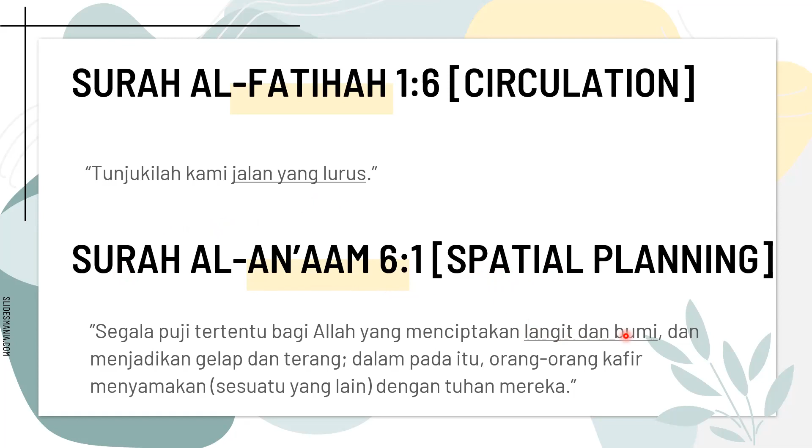The third ayah is Surah Al-Maidah ayah 8, which will help in our building form and design. The keyword from this ayah is menegakkan keadilan and berlaku adil, meaning fairness. We want to make the building form have fairness in space, so we will use a shape of square, a shape of cuboid, because there is meaning behind it, which is fairness.

Next is Surah Ali Imran ayah 9, which is where we get the concept from. We highlight the keyword menghimpunkan semua manusia, meaning gather all human beings. From this ayah we get the concept of connecting, but in order to make it more suitable to the term of architecture, we filter the word and get the word interlock. We will soon explain about it.

The next ayah is Surah An-Nahl ayah 13, about variety of ethnic. From the keyword berlainan jenisnya, meaning various types, we want to relate this back to the various ethnicities in Sarawak.

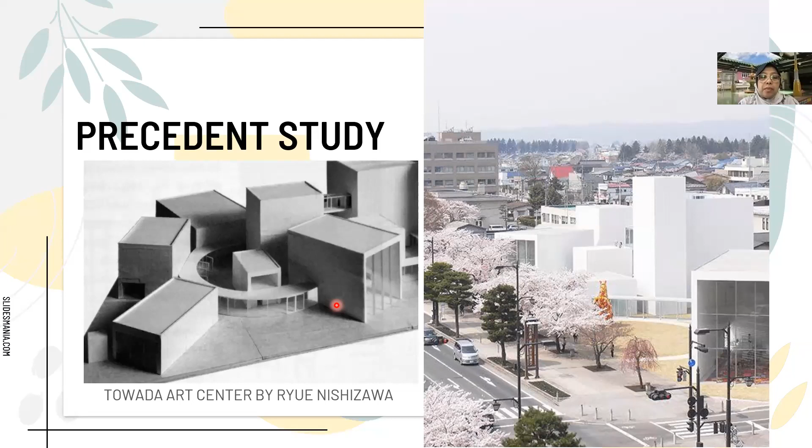So for the design strategies, based on our naqli study, after our naqli reference, we rearrange it to make it more prioritized.

First is the concept of interlock, from the verse of Ayah 9. Next is the form, where the form comes from the solution for our naqli study, which is fairness.

So in the design, we will apply a form of primary shape, which is square or cuboid, because there is a meaning behind the square or cuboid shape - it gives the fairness of the space within it.

Next is the facade, which is from the naqli study of Heaven and Earth. We will apply a building with a big opening of glazed wall, viewing both earth and sky, so we want to have the interlock between the visitor and nature.

Next is the spatial planning. We want to have the interlock between the visitor and nature, so we will embrace nature into our design by putting a courtyard in it.

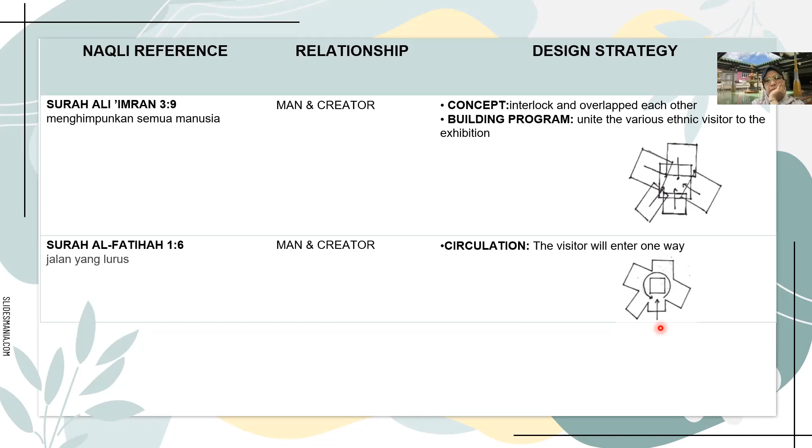Next is the circulation, from Surah Al-Fatihah. The visitor will enter one way and exit only one way, where the path is straight, with turns only to the left and right - we'll show you later. Next is the form of the building.

The building will differ in height to give the rhythm of layering and to show more visibility of the interlock.

So this is our design process. First we make the symbol of unity. Usually when making the symbol of unity, we think of having a circle of a group of humans, where they circle together in a group, like this - this is from the view of the plan.

Where the various ethnicities are grouped together in one shape, and then in order to make them have a more intimate relationship, we make the buildings interlock with each other to show that the various ethnicities have a relationship between each other.

By having the interlock, we want to be more explorative and diverse. So we put the circle shape, where the circle shape gives the meaning that each tribe, each ethnic group, will be looking at each other in order to understand each other better.

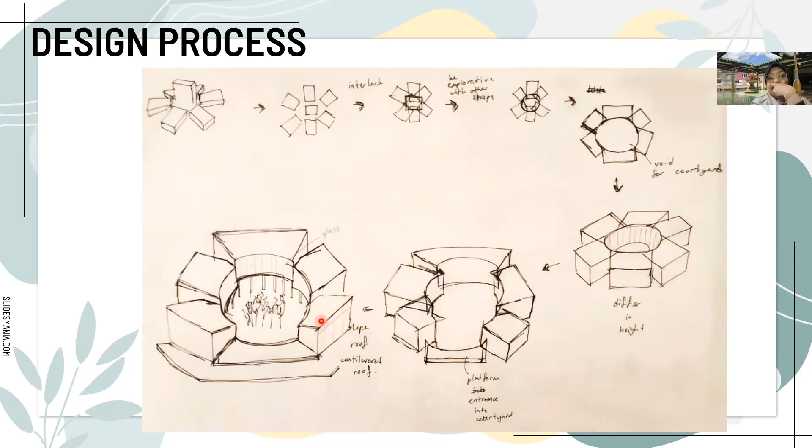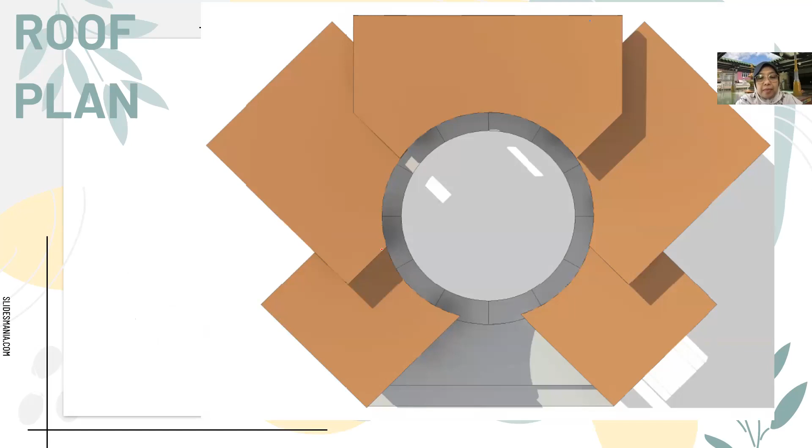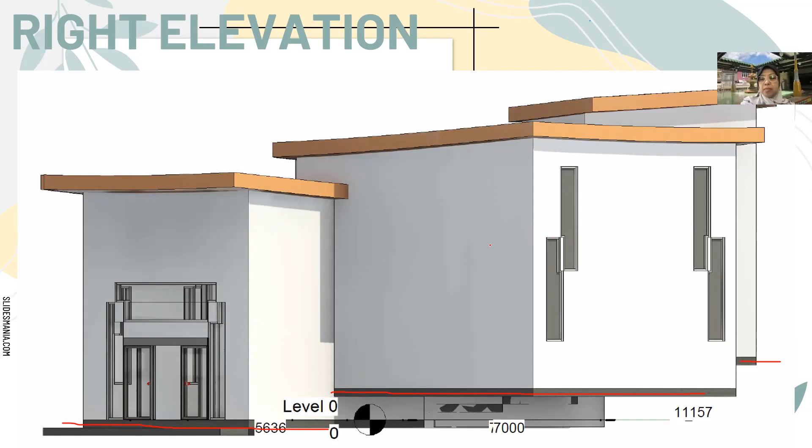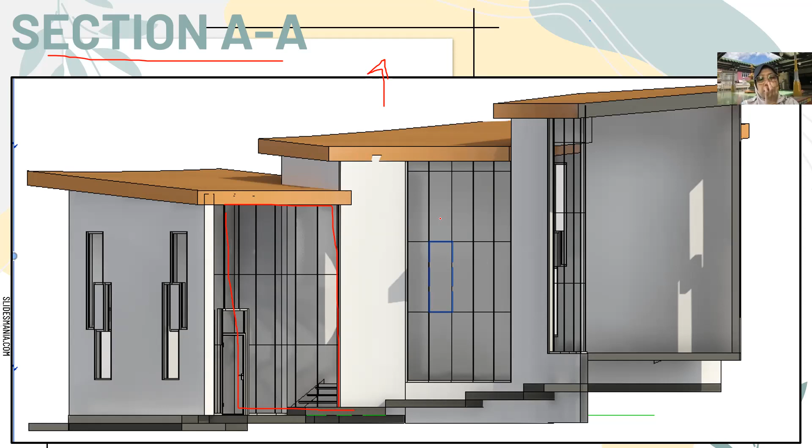Next I want to show how we interlock other elements in our design building. It is in our window, which is interlocked. From the shape of a square, we interlock each window like this, because we want to create a beautiful shadow in our building.

This one shows more visibility of the interlocking in each room.

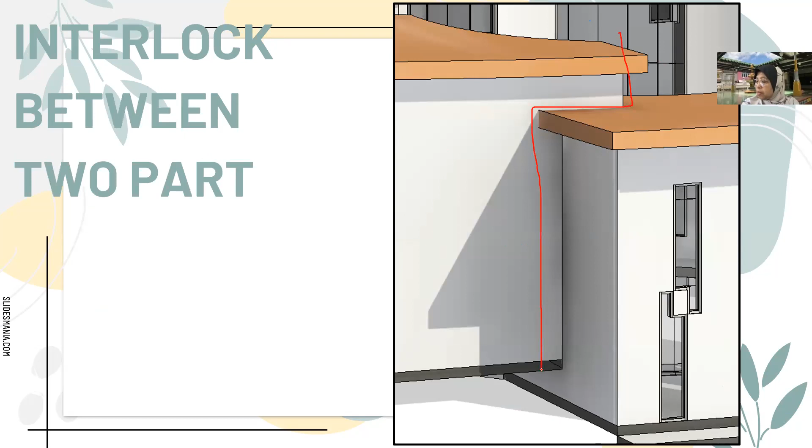So this is the layering platform. In this layering platform, we want to show the process of making lapis, like from the previous explanation, layer by layer, creating a pattern where we can see the layering of the platform.

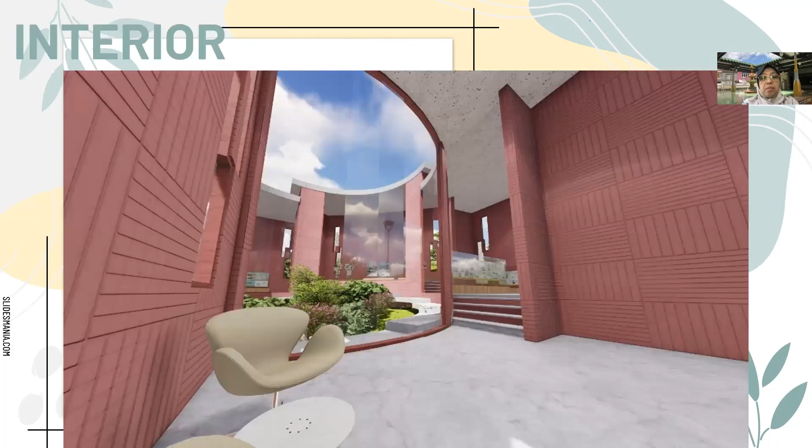So this is the glass wall which is facing each other. This is our interior, where we can see the full glass wall, so the visitor could feel nature through the viewing. This is the interior, and we can see the pattern of the kek lapis installed in our wall.

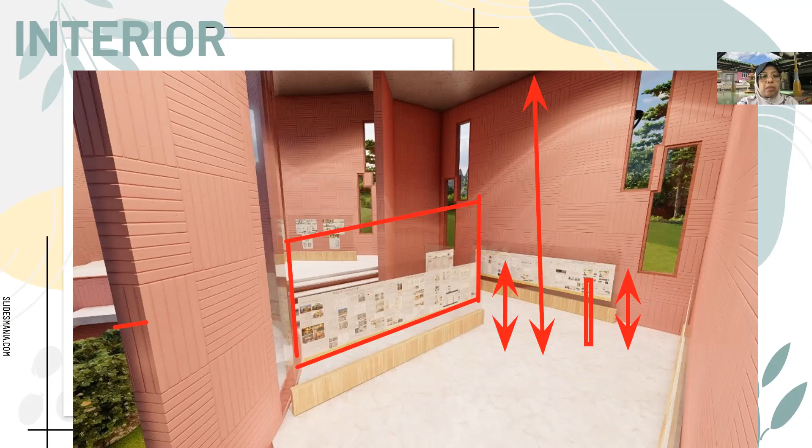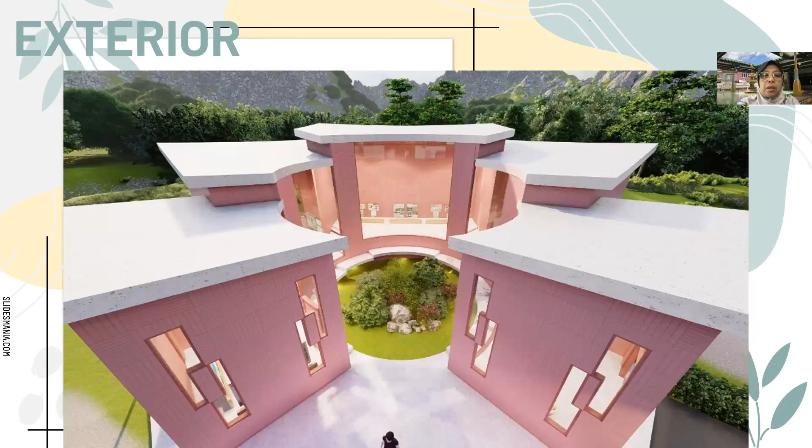So this is our exterior, showing the courtyard and the glass wall facing each other. This exterior view is from the upper level point of view. So that's all, and this is our board.

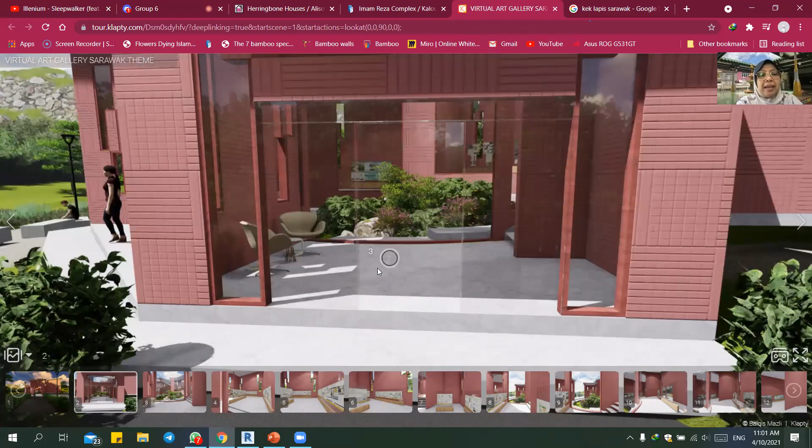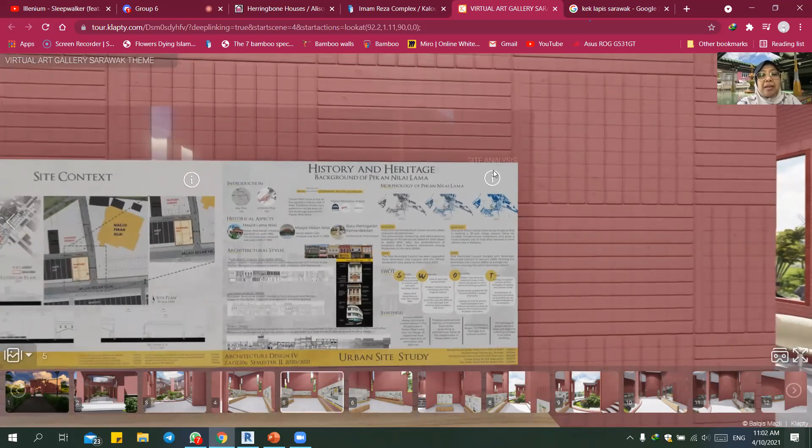Next, on the second floor is the room for site analysis. So the visitor, when they enter the virtual gallery, just needs to push the i icon button, and it shows here.

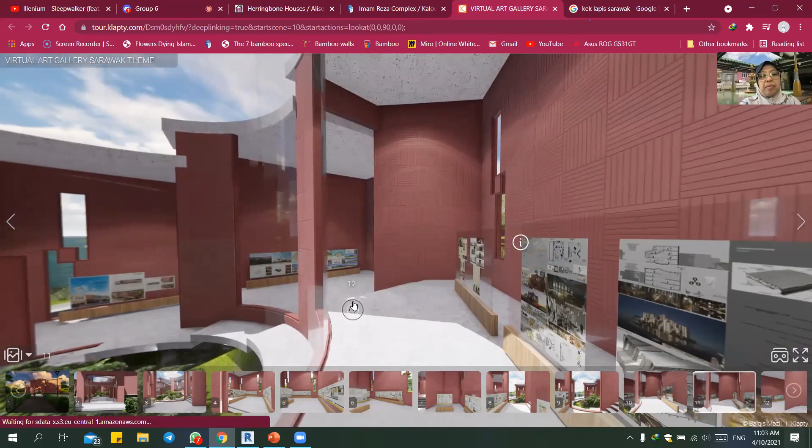So this is the third exhibition room. This is the spot for the third year's project design.

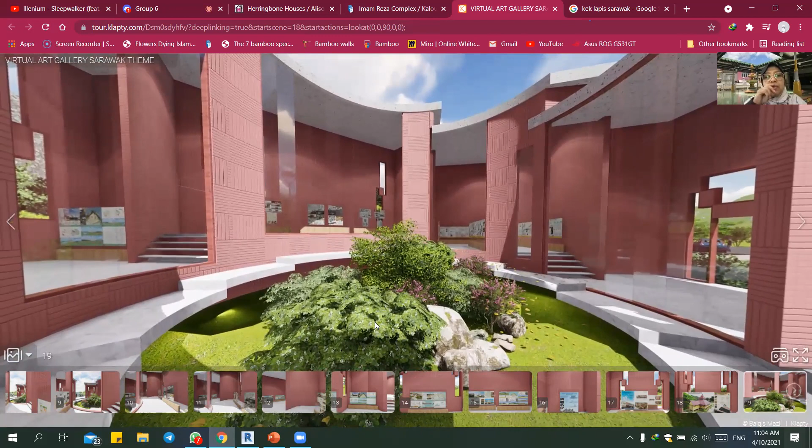So this is the last room exhibition, which is the measure drawing. And then that's the visit of visual art gallery.

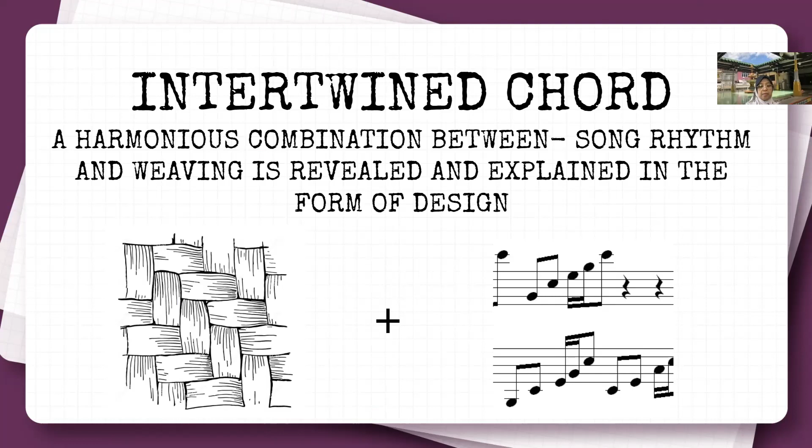Next, I will continue with the precedent study. Our first precedent study is Penleigh and Essendon Grammar School Music Centre, located in Melbourne, Australia, built in 2020, designed by Charles Ryan McBride.

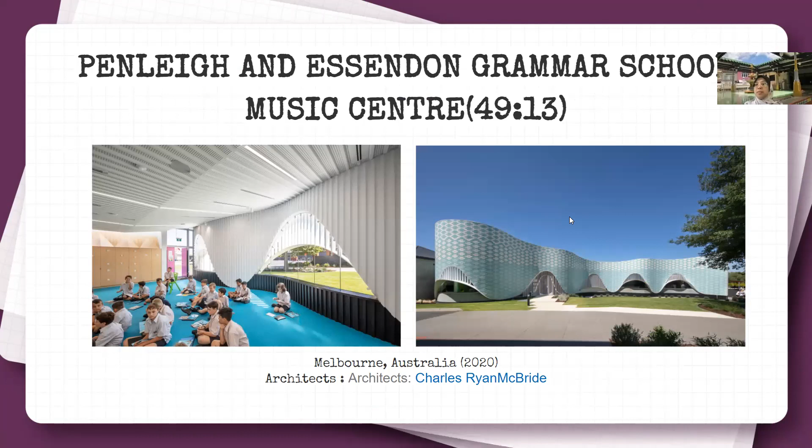The thing we conclude from this precedent study is the parametric design, which is a process based on algorithmic thinking that enables the expression of parameters.

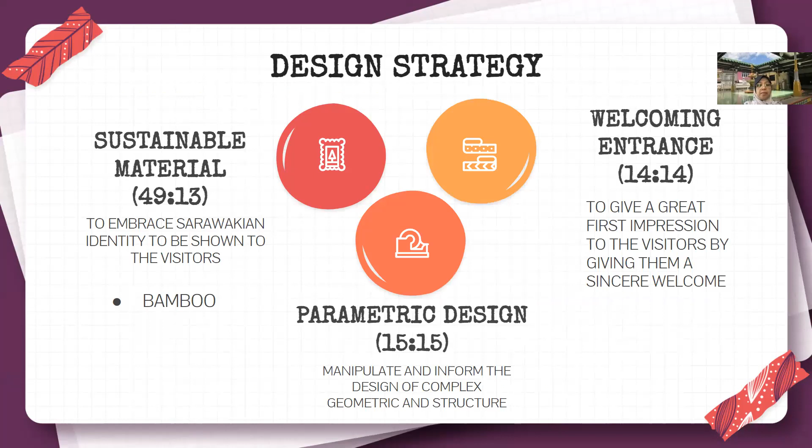Next is Chuan's Kitchen, or Infinity Mind, located in Foshan, China, built in 2017. Here is the design strategy of the restaurant: first, using sustainable material; second, parametric design; and third, having a welcoming entrance.

Next is Centre Pompidou Metz, designed by Shigeru Ban Architects, built in 2010, located in Metz, France. The design strategy is about clear circulation and the parametric roof.

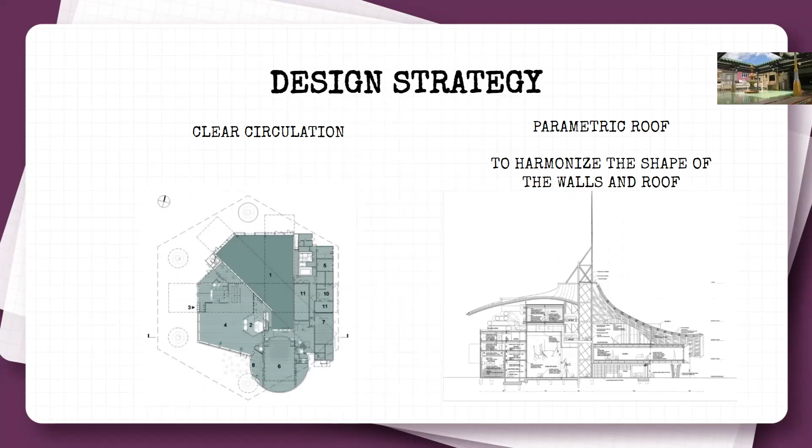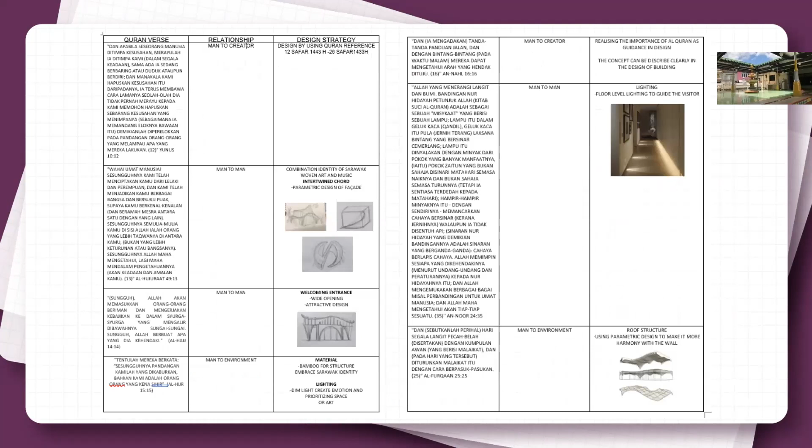To conclude all the precedent study, here is the layout for our exhibition. To conclude our precedent study, I made a table which includes the Quran verse, the relationship, and our design strategy.

The first one is from Surah, the first day of our design, which is on 12 Safar. It is a verse related to the relationship between man and the Creator. This highlighted to us that we need to use the Quran as our reference for our design.

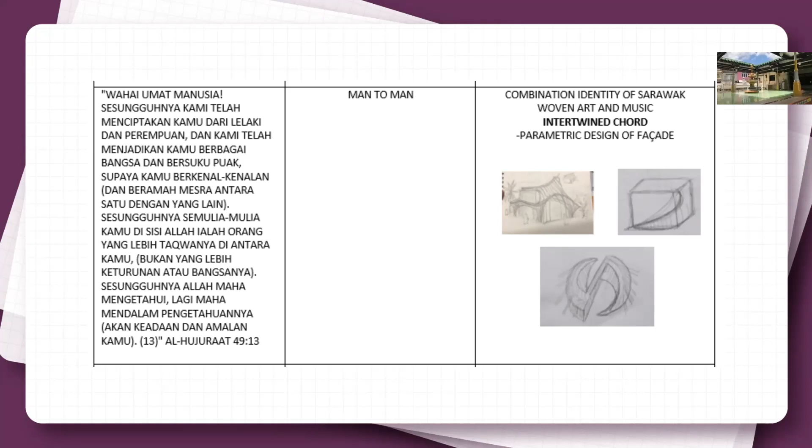Next is on 13 Safar, where our Quran reference is Surah 49 verse 13. It is the verse of the relationship between man and man. So our design strategy for that day is to combine the identity of Sarawak, which is the woven art and music, producing our concept, the intertwined chord. Here are some sketches of our building.

Next, on 14 Safar, here is our Quran reference. It is about the relationship between man and man. In this verse, Allah states that in heaven rivers will flow beneath it, truly Allah does what He wills. This verse tells us about how beautiful heaven is, how attractive it is.

So we relate it to our design strategy, which is the welcoming entrance. We want to attract people. We want to tell people about the beauty of our art gallery.

Next is on 15 Safar. There are two relationships: man to environment, and man to man. We decided to use bamboo as our main structure, also to embrace the Sarawak identity. The second is our circulation; we want to have a clear layout for our virtual gallery.

Next, on 16 Safar, the verse is related to man and the Creator. On that day we realized how important the Quran is as our guidance in our design. Next I will show our building, where you can clearly see the concept.

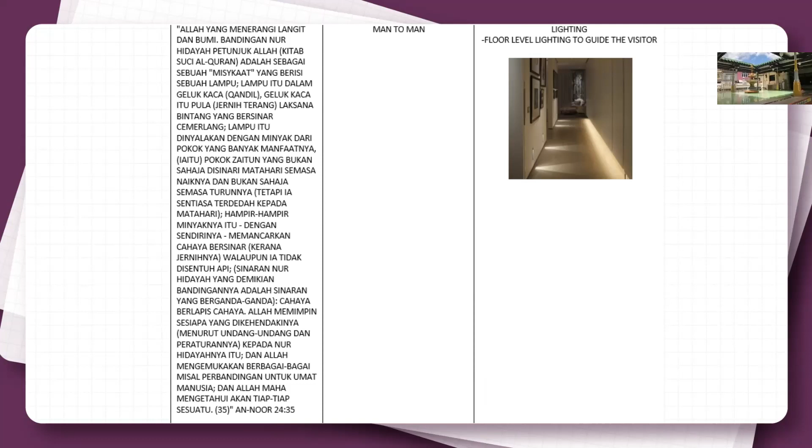The last verse is about our design strategy for the lighting. Here are some of the sketches of our early design.

Next, I'll pass to Akila.

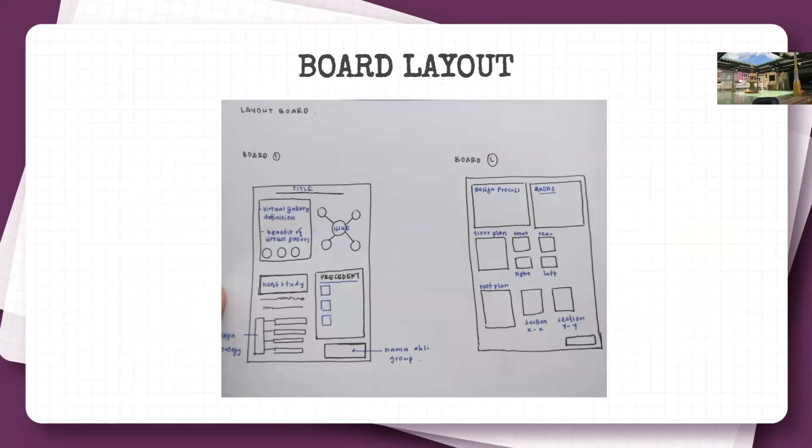Never mind, I will continue with this.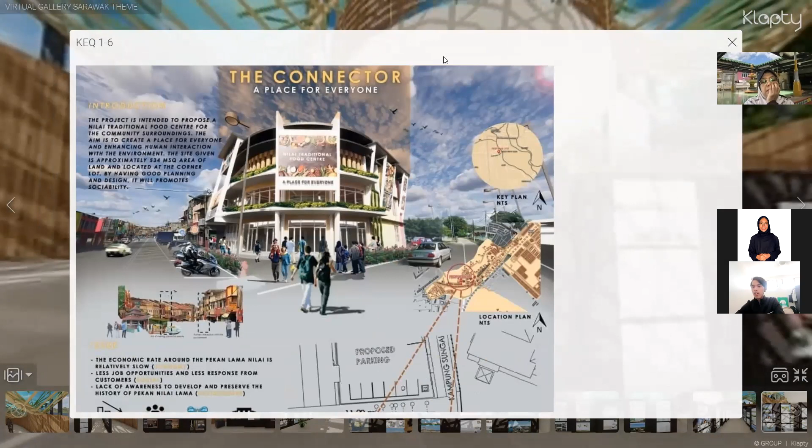Ada lagi nak tambah, Faiqah? Itu saja. Hidayati? Luqman, anything to add? Tak ada macam. Okay, cuba pasang balik you punya final board tu. Saya komen dulu Madam Yati. Take turn. Okay, tak banyak nak menulis.

Boleh on balik board tadi, final board? Hidayat? Macam mana, Hidayati? Hidayati nama manja apa, panjang nak panggil Hidayati. Yat, oh Yat, nanti lawan pula Madam Yati ya. Oh Yat, disclaimer Yat, Yat, come on Yat. Kan, sudah tersedap Hidayati, oh saya ke? Kan. Qayyim masih tunjuk tu je kan?

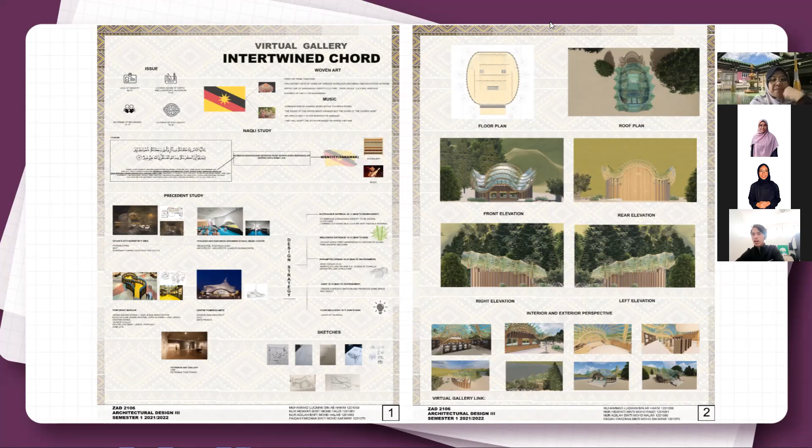Alhamdulillah. Thank you, Madam. Aih, sedih je bunyi korang. Jom.

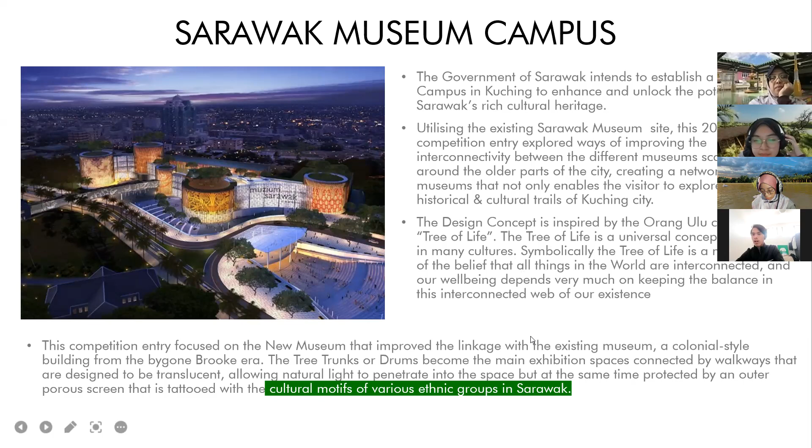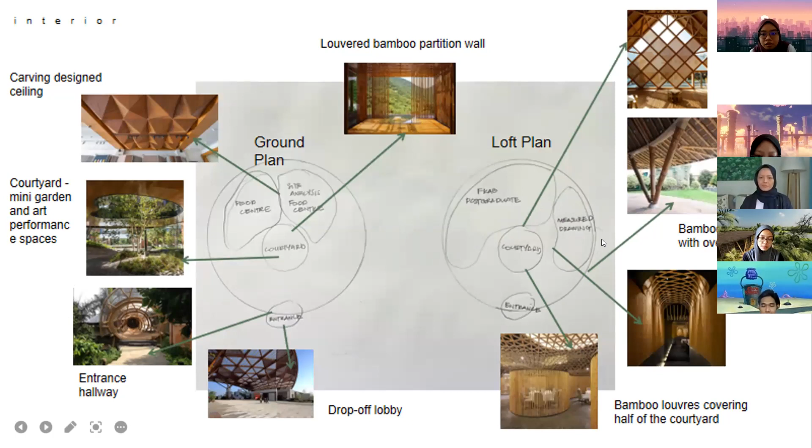This is the plan for our mezzanine floor, which has the FCAP postgraduate exhibition, and to the right is the measured drawing exhibition. Okay, and this is our sketches and how we relate them to our Nakli.

Can you guys, do you want to add something? Go, Syifa. Ada tak? Qayyim.

Bisa. Lepas ni nak pergi ke mana? Yang you suruh dia orang add ni? You nak masuk building dah?

Ada sikit sketches pasal ini, let me explain. Ni sebenarnya sketches Qayyim.

Mana abang tu? Yang macam ni tu mana? Dia syahid dah.

I want to show the circulation sketches. Nak tanya sikit, Fifa Izzah. Apa tadi BOK tu? How do you pronounce it? Bok. That's your concept, is it? It's our ideation. So di mana yang you transfer that idea of Bok tadi tu?

We interpret the Bok, which is the function of it, which is to protect and to shield, to memelihara the user, and interpret that into our issue, which is we want to show the Sarawak motifs or theme while preserving its own identity, which is we use the motifs from it.

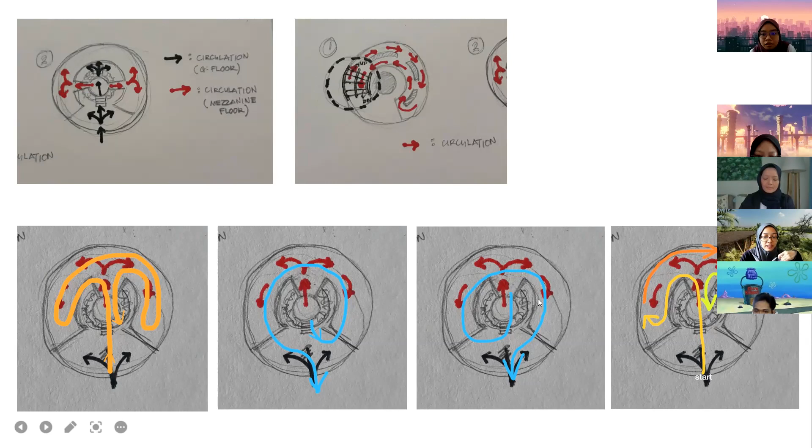So itulah kami punya circulation. Dia akan mengelilingi the upper floor, and then baru dia turun ke bawah and mengelilingi the lower floor. Okay, that's all for the sketches.

This is some more sketches to relate to our issue, which is we want to have the welcoming entrance, and this is our sketches. And then for the enclosed gallery no natural lighting, we add, which is from the design strategy, the skylight on the roof.

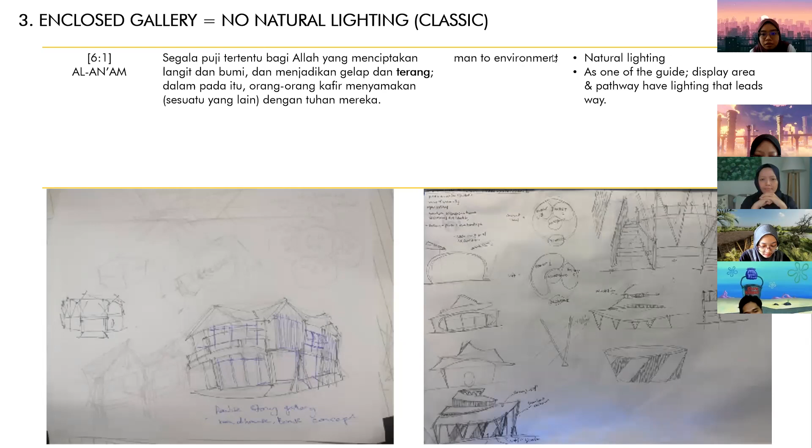And then lastly, our main issue is we want to give a new look to Sarawak theme while presenting the Sarawak identity. We use the motifs and also the material of bamboo to represent the identity of Sarawak.

While also our design added some more element, which is the contemporary element. And then this is how we classify our classic and our contemporary, which is the classic is we have our motif, the thatched roof, the bamboo material, and also the natural lighting. Our contemporary element is we have the partition material, the pattern ceiling, the slanted V column, and also our partition shape. And then moving on to our 3D model.

Klasik ini, kami classify the classic and contemporary punya element macam yang kami apply to our virtual gallery. Oh, yang klasik ni yang asal lah kan? Contemporary ni is your design. Dan kami gabungkan semua dalam satu gallery.

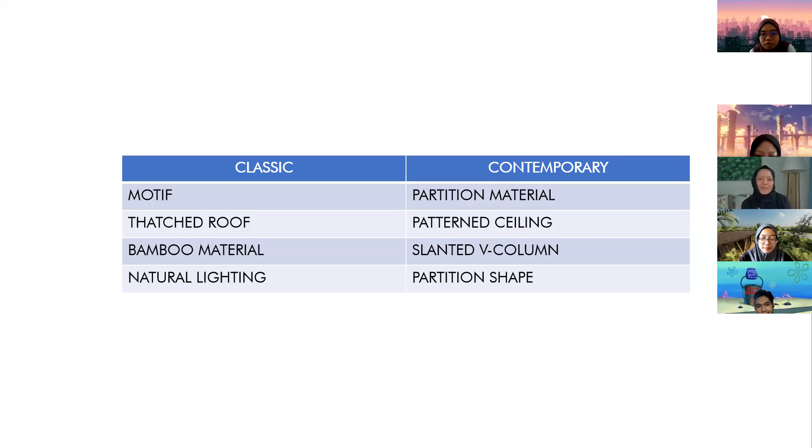And this is how, sorry, tapi mana? Daripada front balik, nak feel. Okay, so front tu glare lah, dia nampak kena pakai topi. Kita buat macam ni.

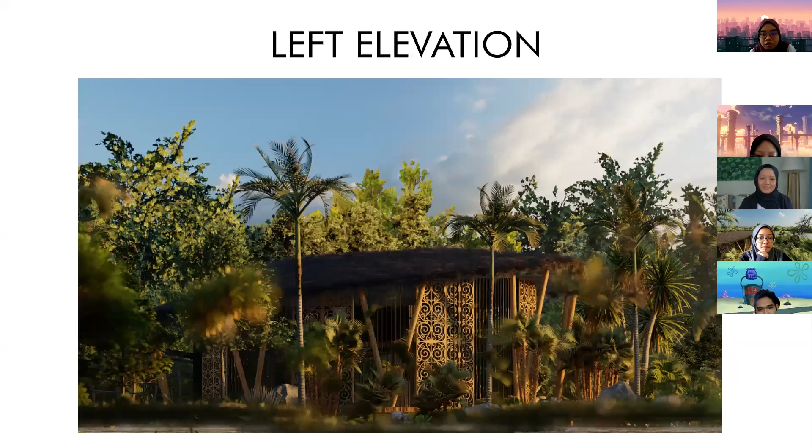Okay, front, and then this is right elevation, and then our left, and lastly from the right elevation.

For this we have the space division, divided into 4 spaces representing the 4 exhibitions: the food center, FKAB postgraduate, measured drawing and site analysis, and food center boards. So we have these partitions. This is how our partitions look like - the FKAB postgraduate partition, the site analysis partition, the measured drawing, and lastly the food center under the mezzanine floor.

Is this your design? Yes. Okay, slow down a bit. Sorry, I'll try to slow down.

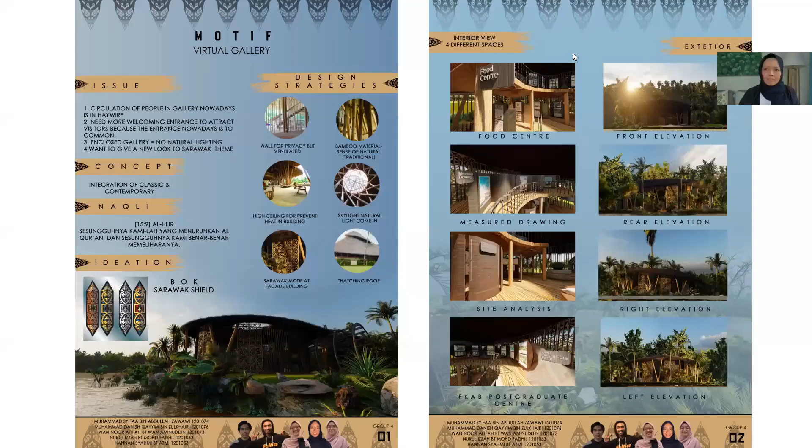This is the view from the outside, showing our context. This is another picture of exterior and interior here, the sitting area. And then the full view of our virtual gallery. And then this is our board.

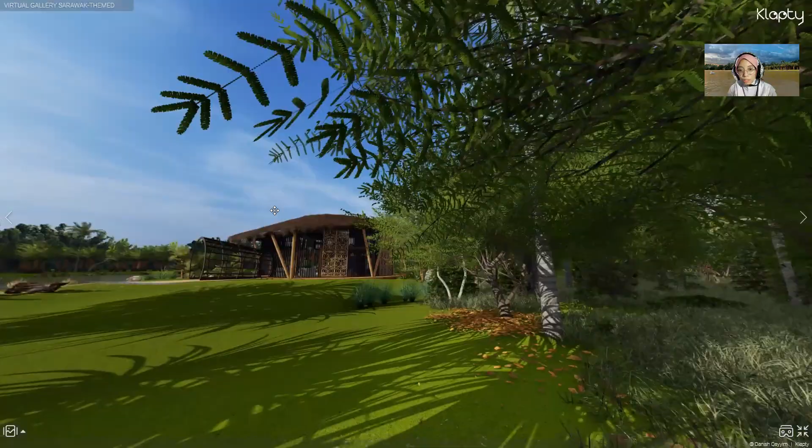So first, this is from outside, from the side, before entering the art gallery. So this is our entrance.

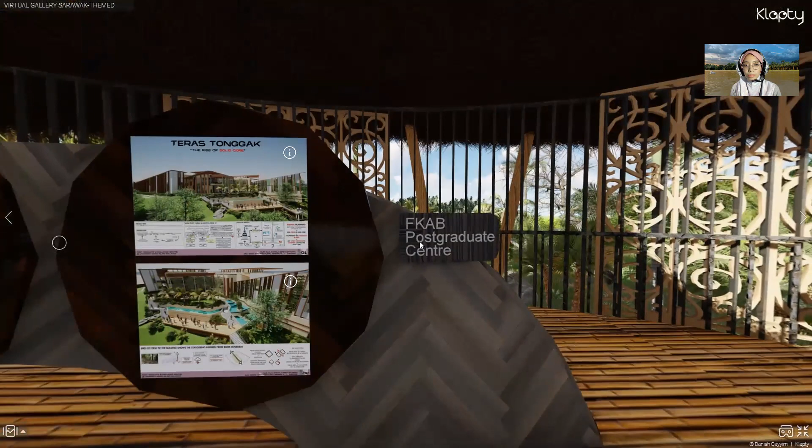So this is the view right after we enter the art gallery. Here at the center is like a platform for the visitors to sit after they have ventured around our virtual gallery. So as Izzah previously explained, the circulation will go upstairs first, so we will visit the FKAB Postgraduate Center. After this, you can see that each section has different partitions and different designs of partitions.

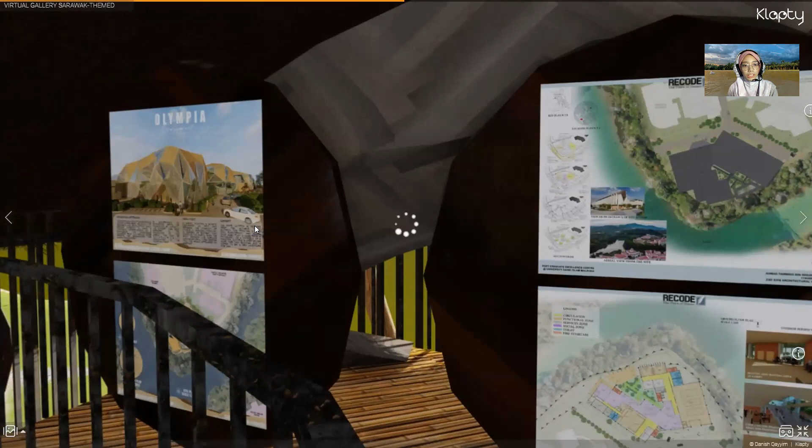So for the FKAB Postgraduate Center, this is it, the partition. The circulation will go around the partition.

This is above the mezzanine floor. The curved partitions have boards pasted front and back. Then we will arrive at the measured drawing partition - a different section, so we enter.

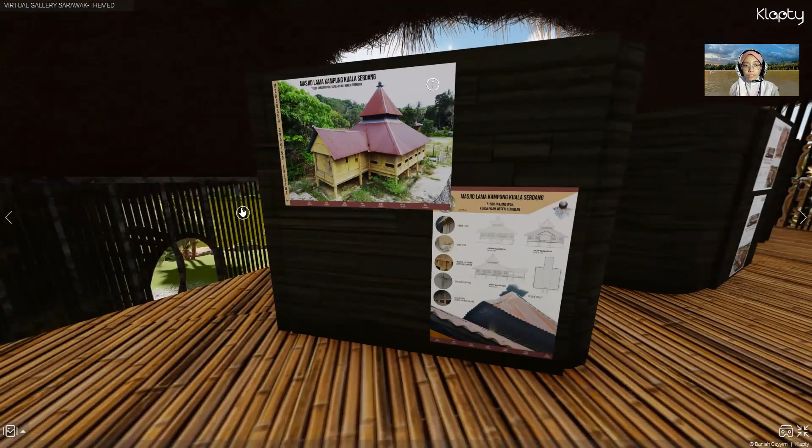Okay, wait a moment, where's Zah? Okay, so this earlier one, the FKAB Postgraduate Center, is right there. But after that we go to the partition of measured drawing here.

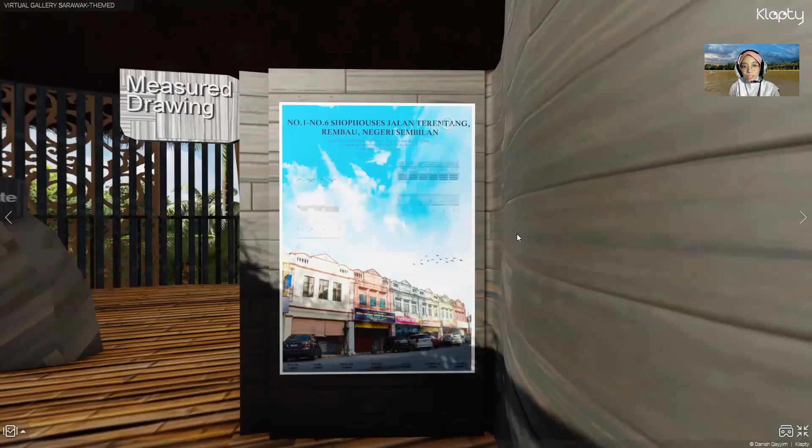So after we have ventured through above the mezzanine floor, we go through to the lower level. This is the food center exhibition. As you can see, its partition design is quite different compared to the other two on the upper floors.

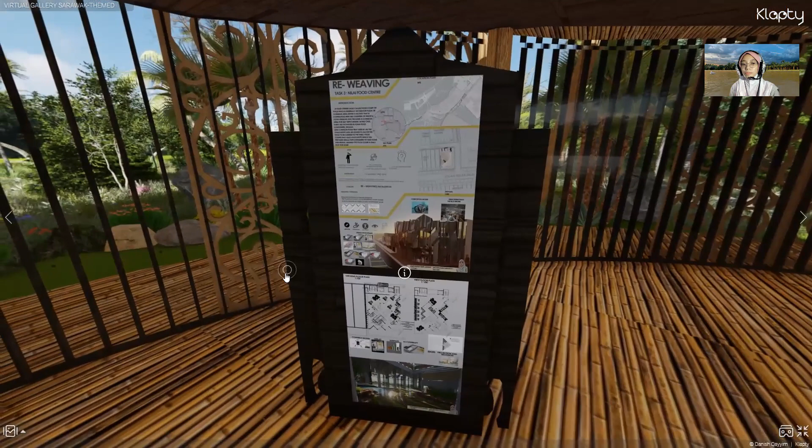Then this is the same - all the boards, all the partitions. It will circle back because a few of the boards in front have content front and back, pasted on both sides of the partitions.

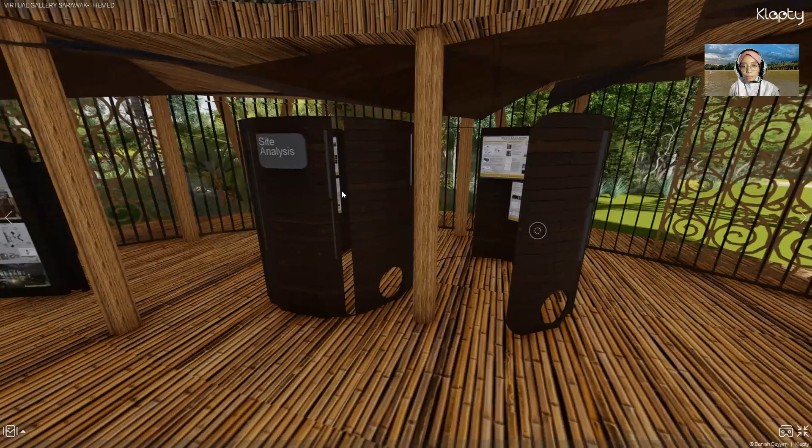And after we have visited all the boards and partitions on the food center exhibition, then we go to the site analysis section. This is the last one, the last partition, the site analysis - the one that appeared curved on the outside earlier. When you enter, the boards will be there.

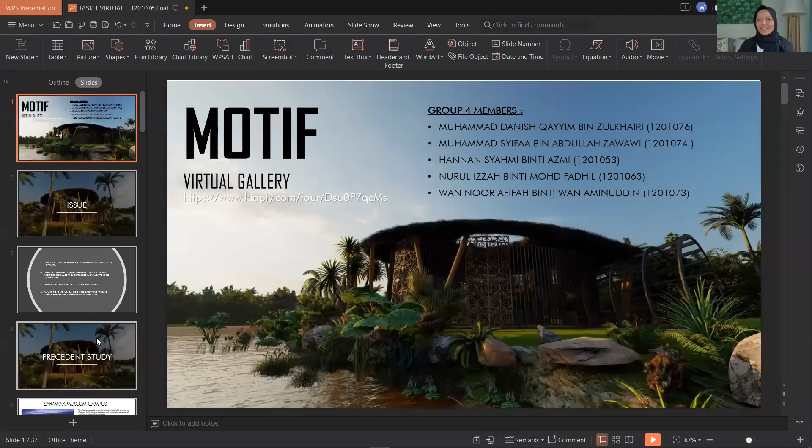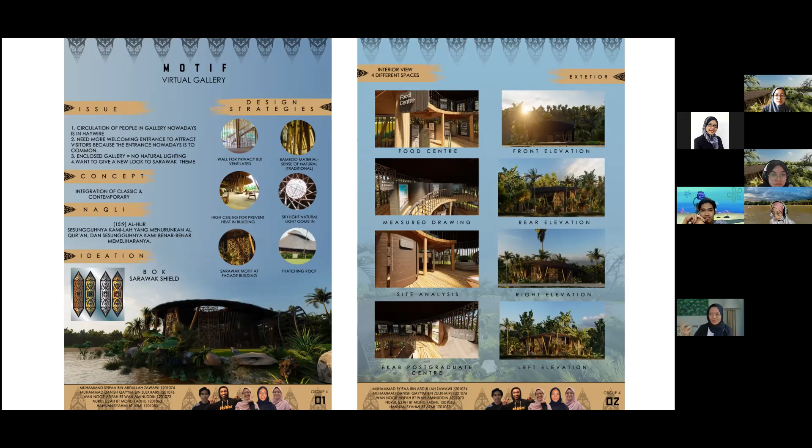And then richness of local motifs, the best lah to me. When you have those panel kat luar dengan motif-motif and then you have it perforated, I macam wow, dia boleh create shade and shadow there, very dramatic sangat. So it's a clever idea lah sebenarnya.

Okay, the richness of local motif integrated into the design. Lepas tu bila you masuk dalam building tu, you siapa yang pernah create dengan saya tak ingat lah. Saya kata bila you jalan, you nak tengok display board, tapi you are surrounded with that the beauty of your building. Lepas tu you ada carving tadi tu, bok carving tu, and then you ada shadow bok carving dekat perforated panel tu.

That's the beauty of overall design sebenarnya. Jadi sebenarnya I bukan tengok you punya board sangat, I tengok macam atas, bawah, kiri, kanan, what is the shadow yang casting daripada situ. So itulah architecture, bukannya tunjuk satu saja. You fikir the whole thing. I think I credit you for that lah. Bila you boleh fikirkan benda-benda macam tu, you are reaching there, you're reaching to that point.

Okay, the killer drawing. The killer drawing is too gloomy. Patut ada lampu dia kat depan ni, lampu, so dia pancar sikit, cerah kat sini. So bukan cahaya dari belakang, cahaya dari depan.

And then probably the water should be a bit green or bluish so that dia nampak real sikit. Dia nampak real dah tu macam Madam Yati cakap. Betul juga, nampak air dia keruh ya. Saya rasa, letak lampu kat depan, so that dia pancar you punya perforated panel dan you punya thatch roof tadi tu.